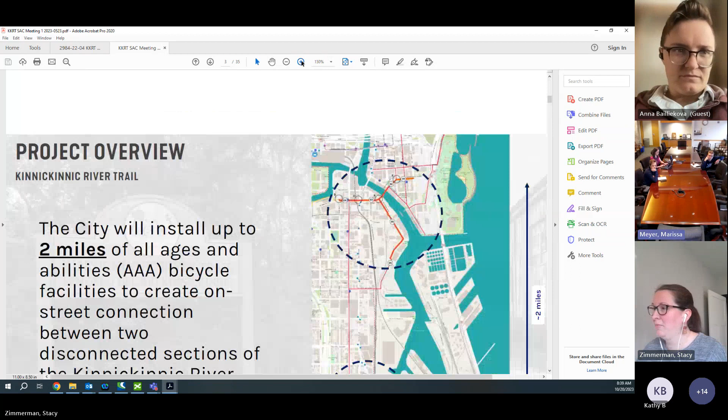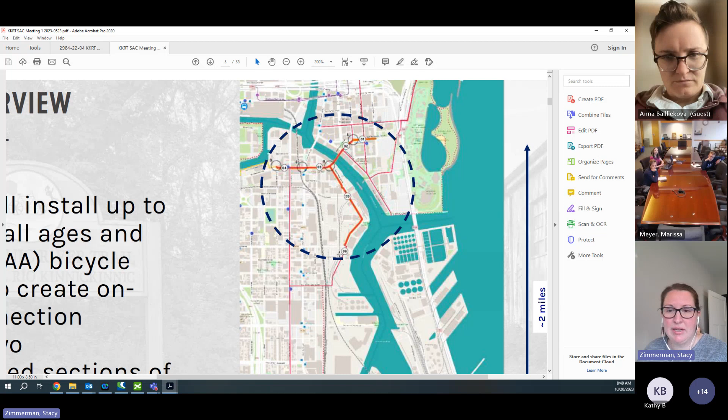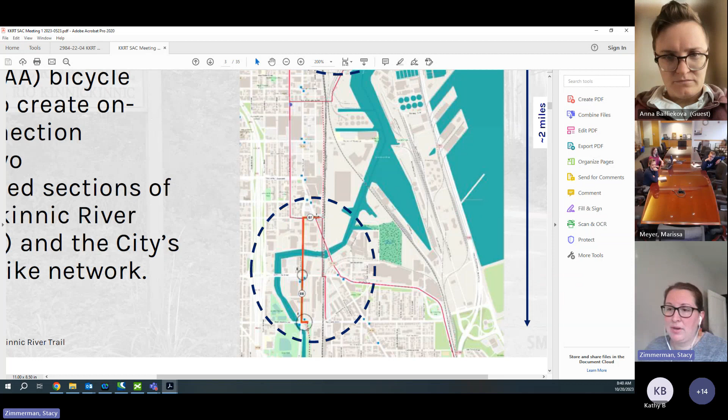So the northern segment connects over by Jefferson Street, kind of over where Summerfest is, goes over to Young Street, crosses the river, and then goes down Pittsburgh to the connection on the Hank Aaron State Trail, all the way over on the west side. And then the on-street connection will go down Water Street and connect up to where the trail starts, kind of over by Boone and Crockett on Water Street. And then we skip down because that's where the trail already exists, and the trail lets out on Maple. So we'll be picking it up there, going on Maple, down First Street, all the way to where the trail is existing on the south end.

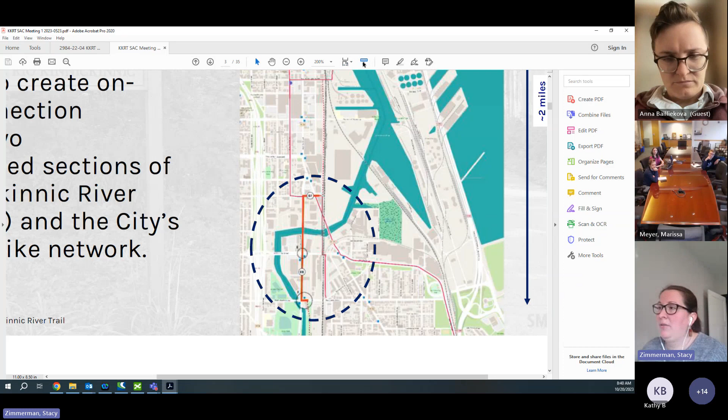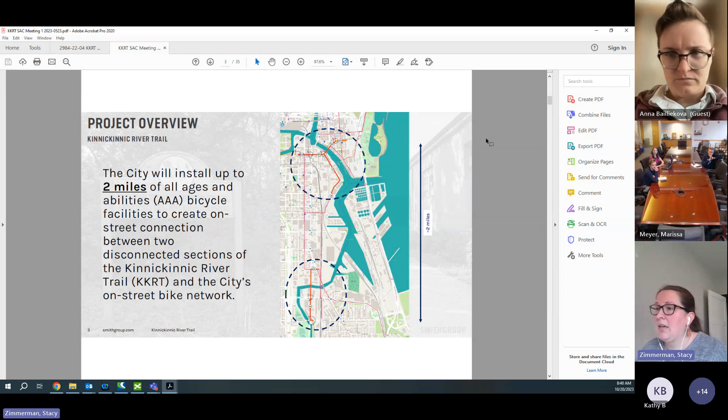So that's the 2 mile segment that we're connecting with on-street bike accommodations. The accommodations considered were one-way protected bike lanes or a 2-way cycle track, depending on the location in the street, whichever made more sense for the area. We're actually utilizing both of these alternatives.

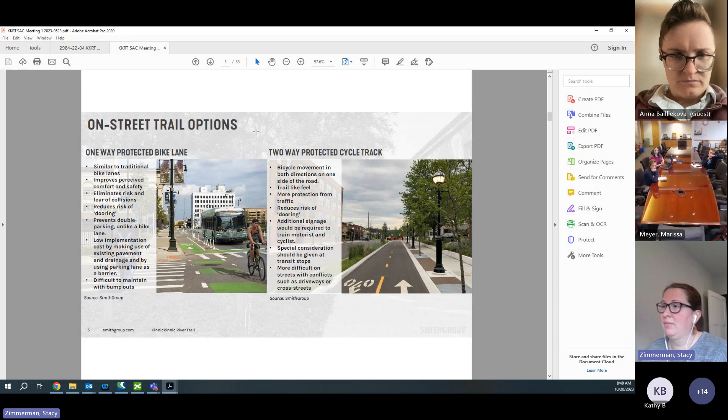So I'll skip to the map, which also takes a little bit to load, but I feel like this is the best way to really show where the project is located.

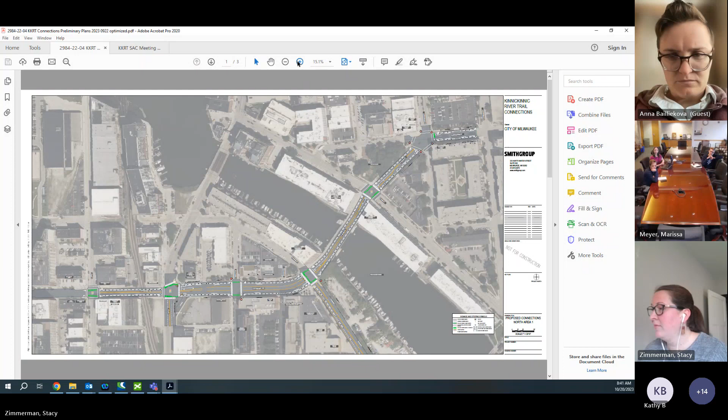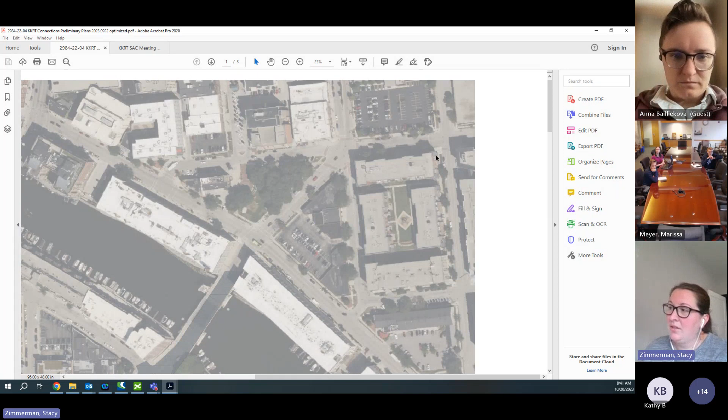So the segment starts over here on Jefferson Street. I assume you can see my mouse too, right? Yes. Okay, starts over on Jefferson Street with... oh, and I should also caveat that these plans are about in the 60% stage.

That means we still have to write a design study report and an environmental document, which gets approved by WisDOT because this project is utilizing federal funding. So once those documents are approved by WisDOT, then it's really a real project. It is a project now, but it's still all being proposed. Nothing is finalized, so these are our proposed alternatives for right now.

We are currently discussing with MCTS to see if they will move a bus stop, what are their needs. This trail does cross a state highway, which means that WisDOT will have say on what we do on those roadways. So this is what is proposed currently.

I don't know if anybody... The section of state highway is like Pittsburgh and crossing First. Is that correct, the only state highway? Okay, yep, so it'll be...

So it's State Highway 32, which the trail will run along on Pittsburgh. And then when we pick it back up on the southern segment, we're crossing at KK and Maple.

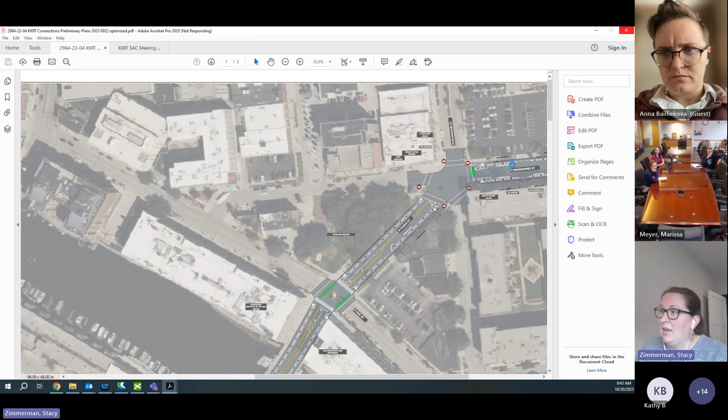So the trail picks up, starts on Menomonee Street over by Jefferson. And that is a protected bike lane with bollards and also with parking.

Man, I'm sorry, this file is really huge. So if anybody has particular intersections or particular segments that they're really interested in, I would be happy to discuss. Otherwise, as my file loads, I can just scroll through the project area.

Stacy, you could send this our way too, right? For the group to download on their own? I think, well, what is currently being shared is available on... so what's the website that we use now? It's... okay, Engage MKE. Yeah, Mitch already, he knows where to find it. So okay, good, yep, what's publicly available is on that site.

There's also a map where it has the whole trail segment mapped, and we've received a ton of comments from the public. We've had outreach at Harborfest, at a couple different bike events, and we've really gotten good responses so far.

So starting on Menomonee Street, that's a separated bike lane, parking protected, which means it's on the curbside. Going into the intersection here, this is an all-way stop intersection, and then the lanes will continue on the curbside going down Young Street.

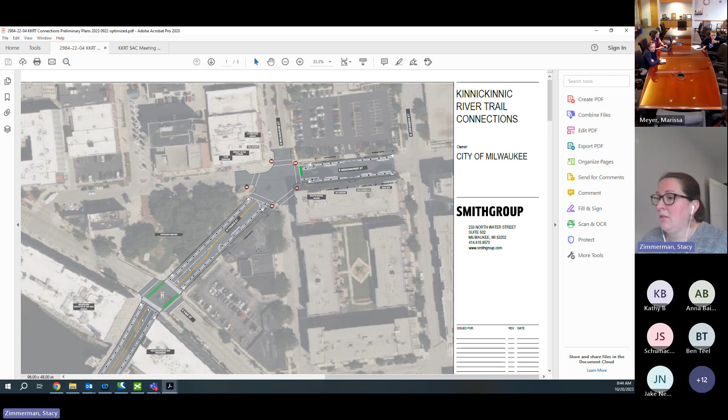Another feature we'll be adding is through the intersections, there will be green paint to try to notify vehicles that they should also be looking out for bikes in addition to pedestrians at the intersections. It's also a separated bike lane going down Young Street, and that segment will continue down Pittsburgh to be consistent.

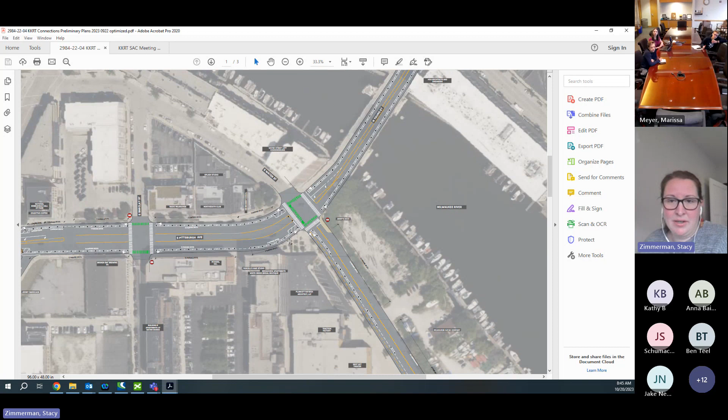There's a huge median down Pittsburgh right now, and we're extending the median just with paint to make it wider, limiting that roadway to just one lane in each direction. So in addition to providing the biking facilities, we're also trying to use various traffic calming measures to restrict the flow of traffic and get people to slow down, because in this curve particularly, people take it rather fast.

So by restricting the lane, by only having one lane, that'll also give bicyclists less lanes of traffic to cross when they are going south onto Water Street.

It's 4 lanes total now, correct? Current, yes, 2 lanes in each direction.

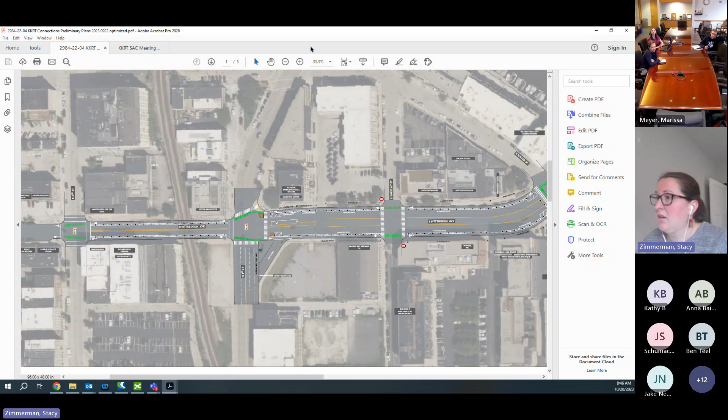One intersection that will be noticeably different will be the intersection of Pittsburgh and First Street. One of the goals of this project is we really wanted to close off the pork chop on the south side of the road, which means the slip lane for when you're going north on First Street, turning east onto Pittsburgh. You can see right here, I have the lane marked as closed.

So there will still be 2 lanes going north, but that'll increase visibility for the biker and limit people who are turning right. So when you're a biker crossing the intersection, you won't have to look as many directions for traffic.

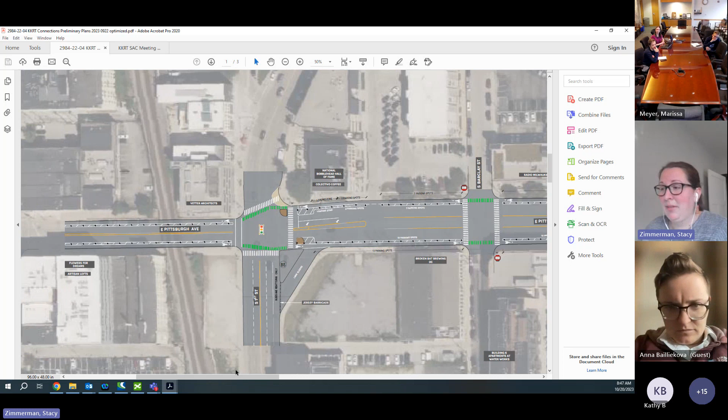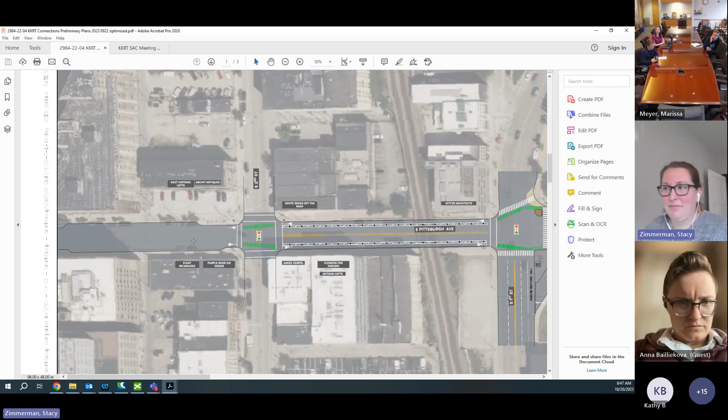This intersection is still under discussion because we have an MCTS bus stop on the pork chop, so we'll see if we'll be moving that further south. The bike lane will continue to the west, and once you get to the Freshwater Plaza area, we've decided to leave that bike lane as is because that segment has permeable pavement and we have limited budget for the project.

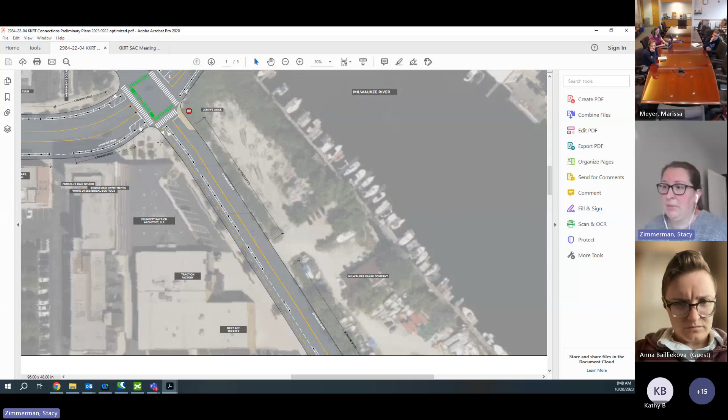So then going south onto Water Street, this is where we will be utilizing the two-way cycle track. The cycle track will be located on the west side of the road. One major reason for that decision was that there are fewer driveways on the west side of the street, so fewer conflict points. Also, the pavement condition is currently better on the west side - on the east side it's rather broken up.

All right, so going south then, there's the two-way cycle track. Should continue onto page 2 once it loads.

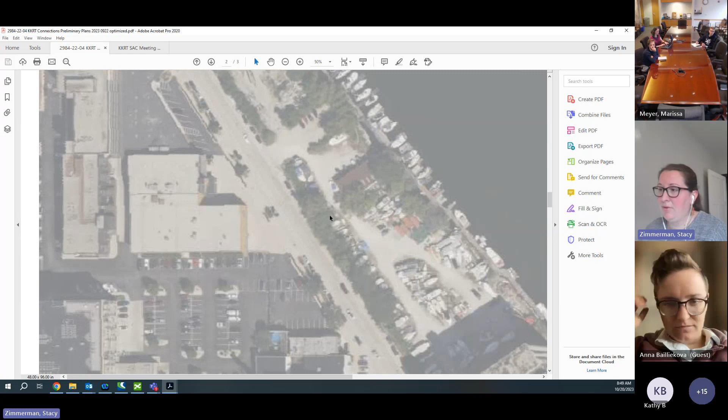And then any roadway that intersects Water Street going to the west, you will also see green paint marking to notify drivers of the bicyclists.

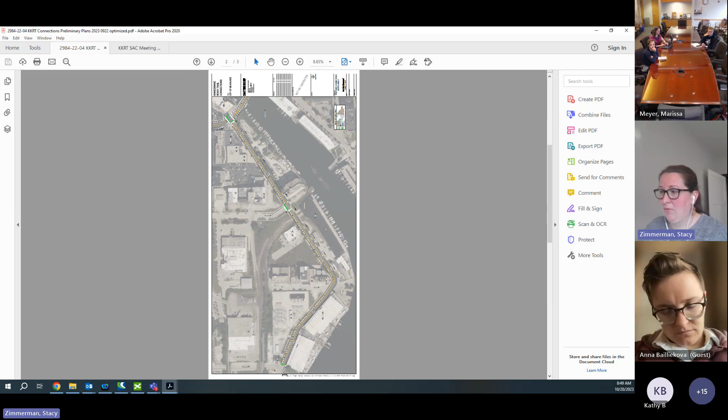Eventually the trail will meet up with the existing segment on the south side, and we will have to cross the bikes from the west side to the east in order to enter the trail, which is located on the east side of the road.

There was a good question in the chat about the railroad tracks there - is anything being done with those? We are currently coordinating with the railroads. There are various options to try to make the surface a little flatter, so your tires don't get stuck in it.

I don't know if that's going to happen, but design-wise, that's the area where we are crossing the bicyclists to the east side, so you will be going over the tracks perpendicular. Hopefully that will make less of a conflict, but the railroad will still be there.

And as you keep going, there's also particular interest in the KK and Maple and First and Beecher intersections. I'm not going to go back up to the north because this is taking forever to load, but the Water Street and Menomonee intersection, I know has also been a point that a lot of people wanted to discuss.

There is currently funding to signalize that intersection. The problem is, for one intersection, you usually want to tie it onto a larger project. So although there is funding and it has been designed, they're looking for a larger project to tie it into, which will be going through the area and constructed around 2027.

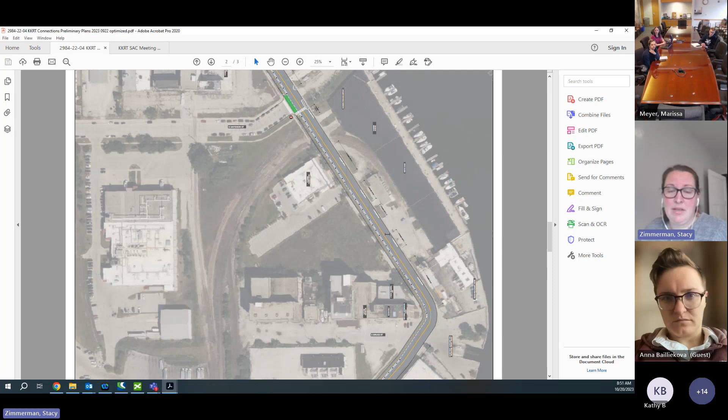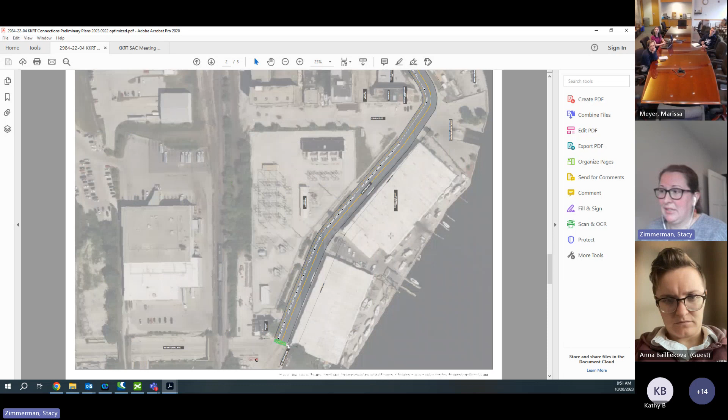In the meanwhile, with this project, which we are currently estimating will be constructed during the summer of 2025, we are looking into potentially adding a beacon at the Water and Menomonee intersection as a measure that'll be in place at least until the intersection gets signalized.

So to talk about the railroad, the only place on Water Street where the railroad will be crossed is at this crossing. We're also considering adding an all-way stop to this intersection. Then the bicycles will come from the two-way cycle track, cross on the dashed green crossing, and enter onto the existing KK River Trail.

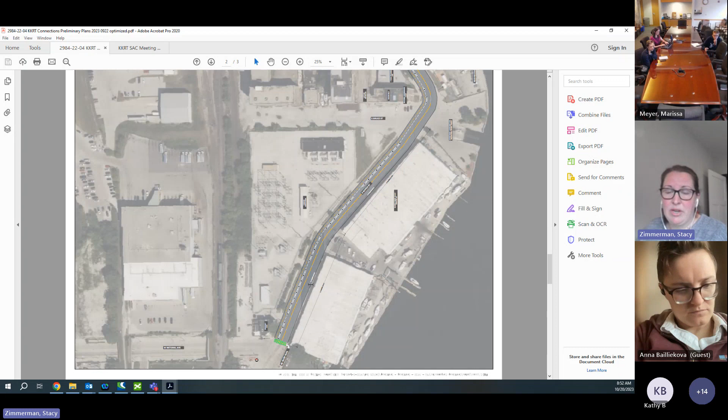I believe there is a crossing on the existing KK River Trail, but we are not touching any of the existing trails with this project - we are just connecting through on-street accommodations.

All right, and then the trail lets out kind of in a back alley area where there's a loading dock. I don't know how familiar everybody is with this project area, but the trail lets out and comes up to this intersection you mentioned, the KK and Maple intersection.

So this intersection, there are no plans to signalize it in the near future. I know many people have asked about it, but it has to meet the warrants of the City of Milwaukee. First there has to be a request, our traffic section will investigate if a traffic signal is needed, and then one of the big things is a funding source and approval by the state, because this is also a state highway. So at this time, we don't have the warrants or the budget to signalize this intersection.

But in order to make it safer for all users, we will be installing a rapid flashing beacon, so you will be able to activate it on either end of the trail in order to cross the road.

I know there's been discussion on the east side about removing parking, which has been removed for a while. I don't know, that's kind of gone back and forth. Our preference would be to remove parking on that side and have a bump out. It's been removed basically all of this year. But I believe from recent information, I thought it would be removed permanently, but there's a new tenant in that building who wants parking, and I'm not sure whose decision that is, it lies with the alderman and our traffic section.

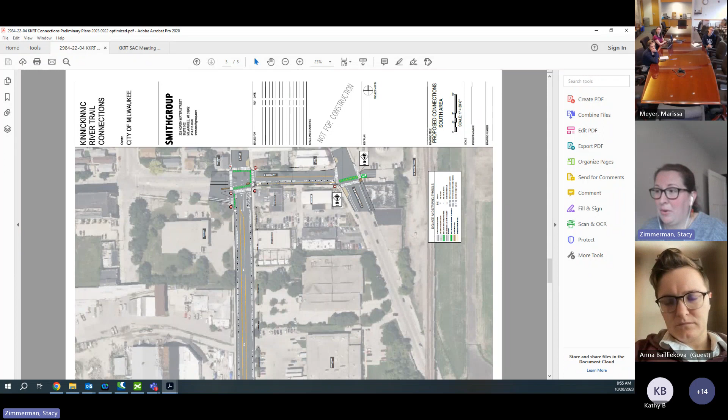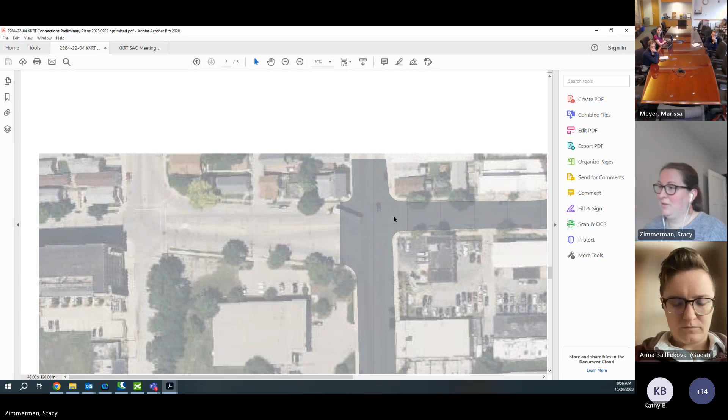And then this intersection looks a little confusing, but it is one of the best alternatives to try to get people through. We will add additional signage to try to make this a little less confusing. Basically anyone coming west down the trail will either, in order to continue straight, have to cross north and then go west. That'll lead them out onto the on-street bicycle facilities that already exist, which I believe might be a sharrow on this road. Or they can continue across the green hatching and go south.

So our main goal was, the green paint isn't just for any bicycle facility, we're trying to clearly show where the trail connections are. Our main concern was to get the people coming from the cycle track south to continue on the trail, but also provide a clear indication of where you should be going if you're going straight, which would be off trail.

We were thinking about closing this pork chop, but at this time, money-wise and with the geometry of the intersection, we're not going to be able to accomplish that with this project. But there are future plans and hopefully future funding where we'll be able to close this slip lane.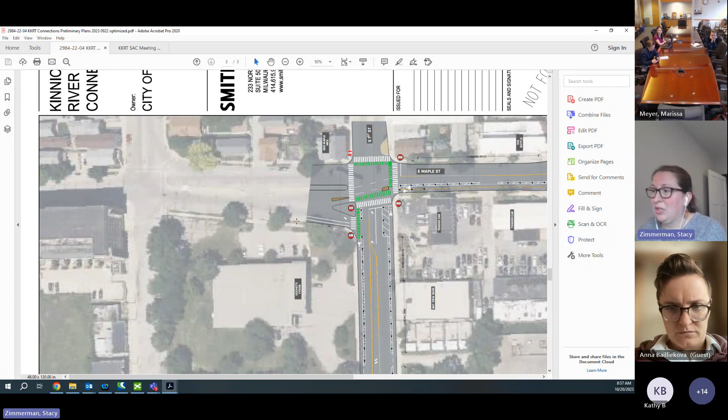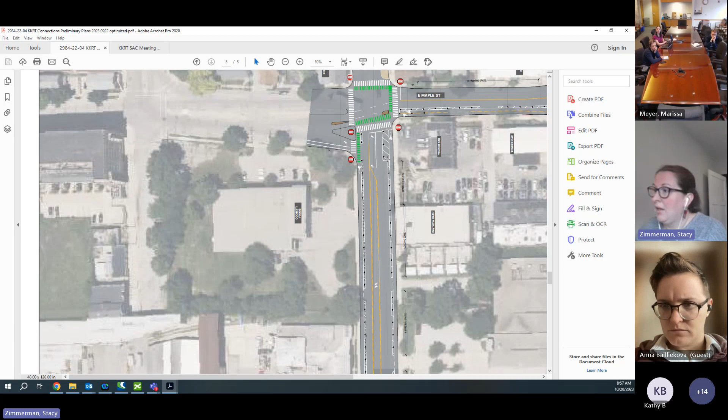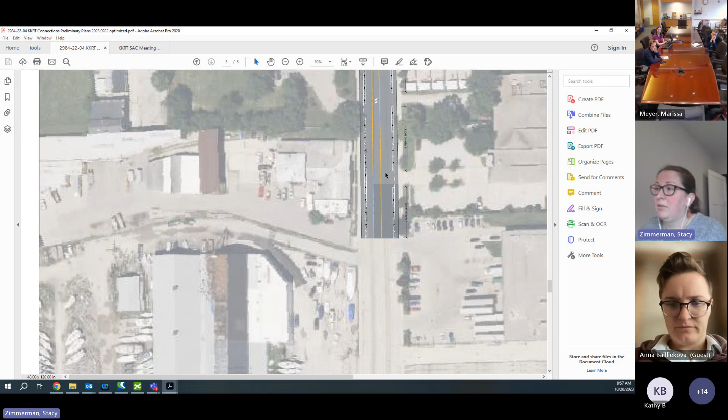Going south then, we're back to the separated bike facilities curbside with parking on the east side. The reason parking is on the east side is that during the course of this project, we've been talking to all of the businesses along the trail, and the greater need for parking was on the east side of this roadway segment. But once we hit the bridge, parking will switch to the west side of the road, and the bicycle lanes will continue south.

Is there need for any parking on the southern end? Both the Lincoln warehouse and the new development across the street have a lot of off-street parking there. You're talking south of the river? Yes. I know what you're saying, but there is room for parking. Another reason is we are restricting the driving lanes, so we do have the roadway width to include parking. So in a way, it takes up space, but also provides a service.

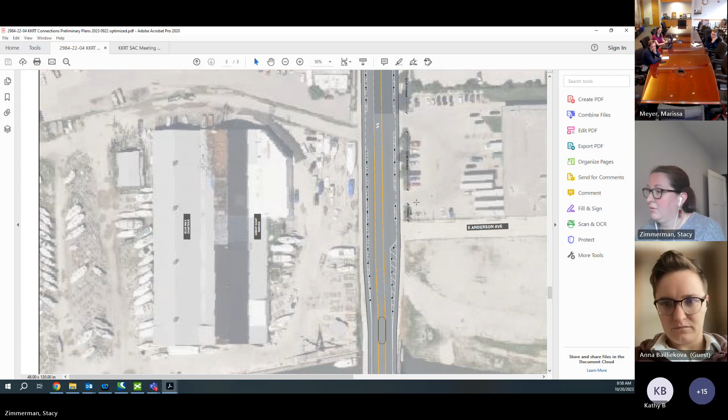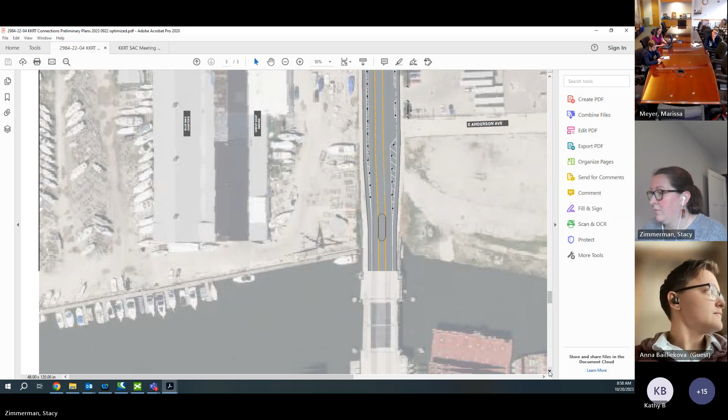Another point supporting what was just said - closing that slip lane would be good. We agree.

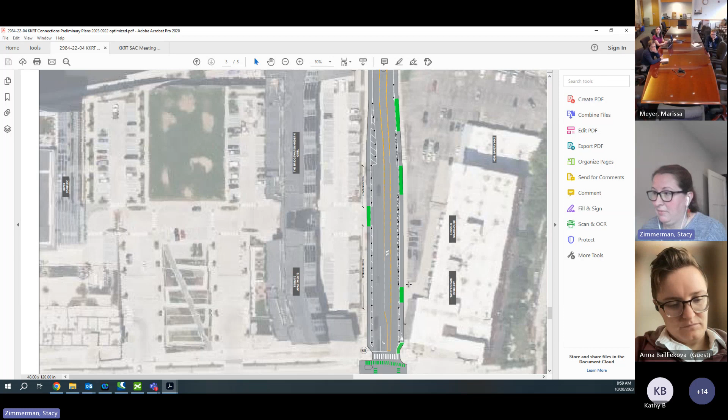Here's the new development too, with residential and commercial uses, and there's been a noted increase in traffic, especially people coming fast out of the parking lots. In this segment it's shown as solid lines, but it'll actually just be striping. We decided that from Beecher to the river it was important to mark out all of the driveways, to get drivers used to the new traffic pattern with bikers curbside, and also for bikers to notice they're crossing an entry into one of the businesses, since the building on the east side has multiple entrances into its parking lot. Then as you can see, the parking shifts to the west side of the road.

The Beecher intersection was recently redone with bump outs, so we're leaving the bump outs as is. I think all of the green paint out there is existing. Does anyone have questions on this segment while it's loading?

Hi, Stacy, I do. On the northeastern corner of that intersection, Beecher and First, it's a difficult corner to take on a bike heading westbound on Beecher to turn right onto First Street. Given how the bump out forms with the bike lane - is this the movement you're describing? Yeah, I'm wondering if that could be reconfigured in some way to make that less of an acute angle.

Are you talking about the bump out? Yes, I've noticed several people using that bike lane who will actually use the curb cut at the sidewalk to get onto First Street rather than staying in the roadway around the bump out. Okay, I'll mention that to the project team - I haven't heard that one yet.

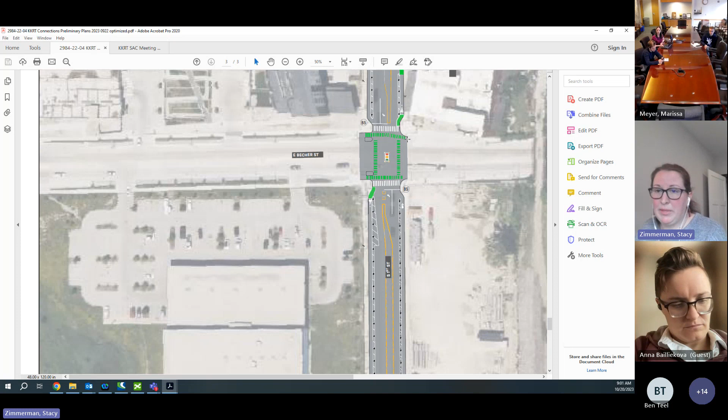Great, thank you. Anecdotally, from a personal perspective, it's even more difficult to do if your bike is loaded down with groceries or cargo, or if you have a longer than average bike. Right, I'll mention that to our project team. I'm not sure if we can do anything because we are focused on the trail, but the multimodal team did just place that out there, and I will definitely tell them your comments as well. Great, thanks.

And then going further south on First Street - hold on, I'm sorry, this is Jake, I have a quick question. I want to second that right turn movement from the protected lane on Becher North - it's a very challenging right turn out into the lane. If you have a car turning left, there's an instant conflict point there.

Also, those lights at that intersection have been on temporary construction poles since the beginning of this. Is there any plan to finish and install all the lights instead of having them blocking the sidewalk on concrete blocks? I don't know currently, but I could ask our traffic section, and Marissa can follow up with the group later. I'll add that they're behind the old ones, so they're kind of blocked, which can be difficult.

Add signals - and I've been told, I think Mike Amson told me, that they were waiting on some sort of supply issue. No offense to anyone personally there, but it's getting kind of ridiculous that they can't get the supply after two years, whatever they're waiting for. So yeah, Mitch is right, it's being blocked. It's still a very frustrating intersection for people on bikes.

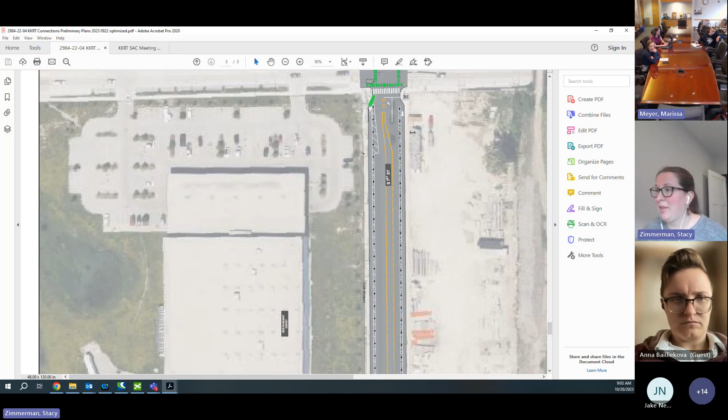Okay, I will relay the message and see what information I can find. I can say, though, that a lot of our ordering for supplies or traffic lights requires placing orders sometimes a year in advance. Supplies are still kind of crazy right now. Understood, thank you. I haven't been there personally, but I will follow up with your question.

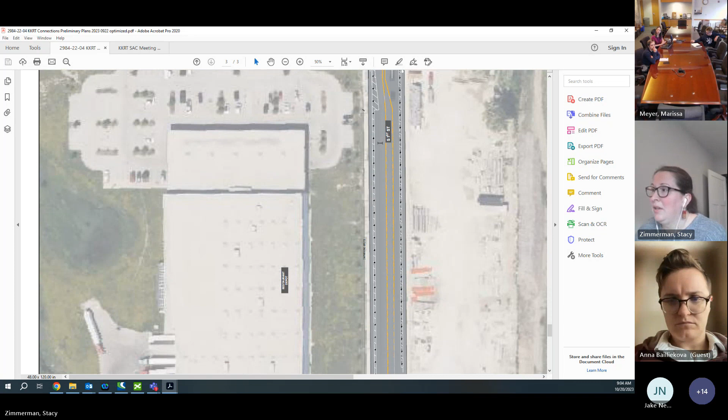Going south then on First Street, there will be parking on the west side of the road, with protected, curbside bike lanes. Eventually the last part of the trail crosses people to the east to meet up with the existing trail, which is a beautiful trail with a beautiful sign. When I started working on this project, I didn't even realize that the trail started there.

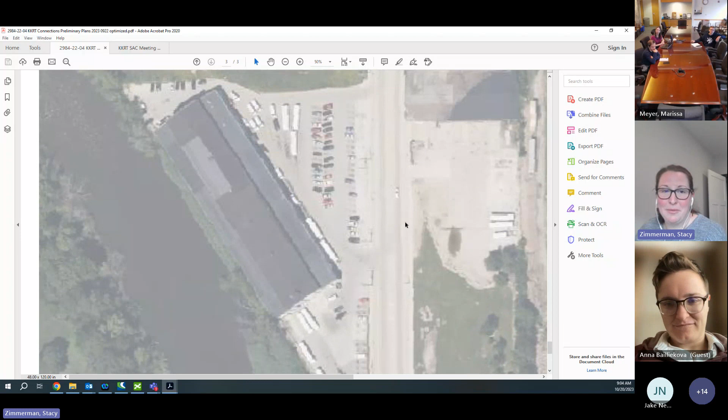Kate has a separate project going on that will install a lot of signs, and it's a great plan for wayfinding, so I think that'll be installed with this project. Hopefully that'll increase awareness of the trails and make people more aware of the options that are out there.

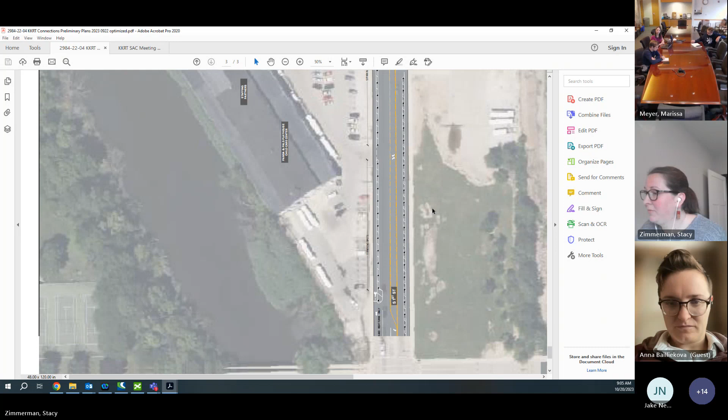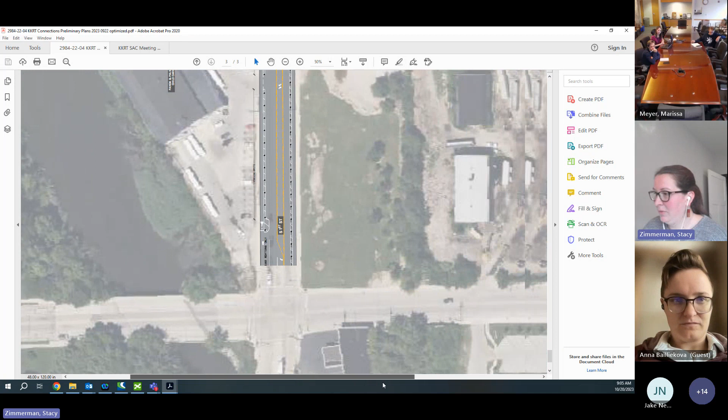I know as this plan is shown, there are still a couple changes that will be done before the final design. So the lanes continue going south. And if you are a biker heading south, there's a bike box here designated where you should stop and wait to cross the road going south, and then to cross going east.

There is a small portion here that has a two-way cycle track. That's to make it convenient for people getting on and off the trail, and also for anyone coming off the trail and going west. We don't want you crossing the road at this location because it's too close to the intersection. The best, safest way was to have a two-way cycle track leading people back to the intersection, where they can cross the road, go north, and continue on Lincoln.

The part that's not shown on this plan is that there is a new development, which I don't remember how many units, quite a few hundred I believe, of apartment buildings that will be going in this long, narrow strip. It doesn't touch First Street, but it's off to the side where this old manufacturing plant was. I believe they will be starting that rather soon, within the next year.

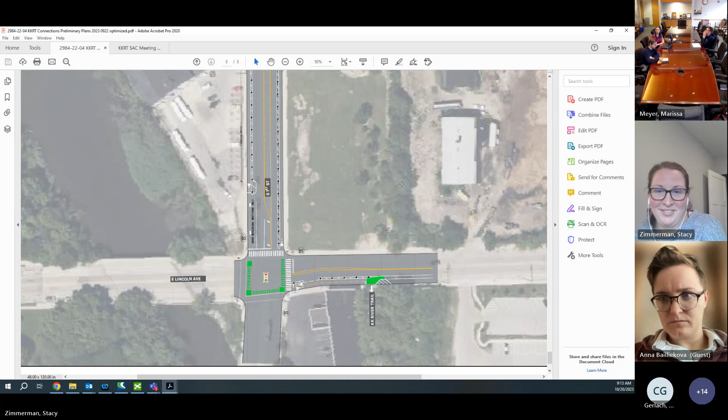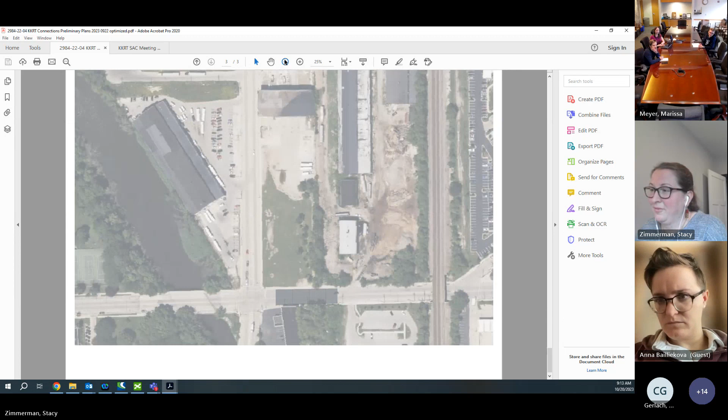Did any committee members or members of the public have any questions or comments? Did you review keeping the Water Street segment on the west side all the way through to the KK Trail? Or did we just say there's a trail on the east side, so let's connect to it? Because now you're going back and forth across Water Street twice in like a half a mile.

The question was, the new two-way cycle track on South Water is on the west side, and having to move to the east side means you have to cross twice. Was any consideration given to staying on the west side the entire time? Yes, because on the south side you go back west again.

This project was specifically designed to connect existing trails, so we did not consider moving the existing trail with this project—we were just connecting to it. We did consider putting the two-way cycle track on the east side of the road, but based on the amount of entrances for parking and businesses and the current condition of the road, the two-way cycle track was chosen to go on the west side. But no, we are not changing existing off-street facilities with this project.

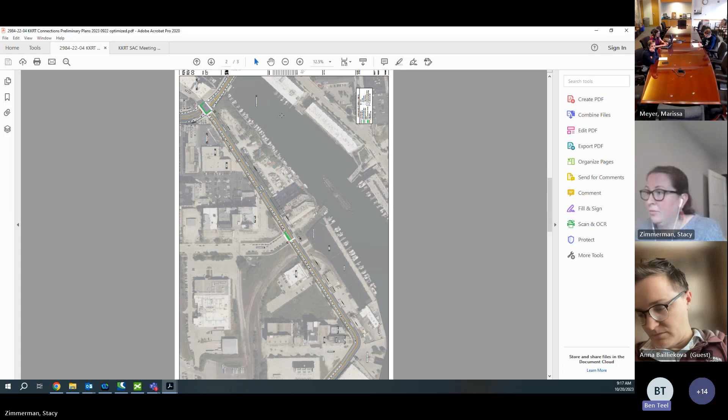Nope, it will still be the existing metal plates. We did talk about that with this project - those metal plates are specifically fabricated for the exact location they go in on the bridge, so we can't even pick up the plates and move them a little bit. You would have to refabricate the plates, and that also changes the loading of the bridge. It snowballs into around $250,000 to $300,000 just for the cost of the plates, not even the design. And anytime you're changing it, because the bridge does move, we need to balance it for loading when it opens. So it priced us right out of doing anything to change that bridge.

Thanks very much for that clarification - yep, they're really important plates for construction. With our construction dollars for this project, we are just shy of $1 million. That's the amount of money we're playing with on this project. That's also why, for the freshwater plaza area, we determined that section of the trail was working quite well as designed, so we're trying to put our money into the more troublesome areas.

Thank you. There was also a comment from Jake about school buses in the protected bike lane on Lapham, just generally that this is a problem throughout the city. He also asked about reporting a non-functional beacon. For that sort of thing, if you see problems in the city that can be repaired, please use either 286-CITY or the Click for Action website and app.

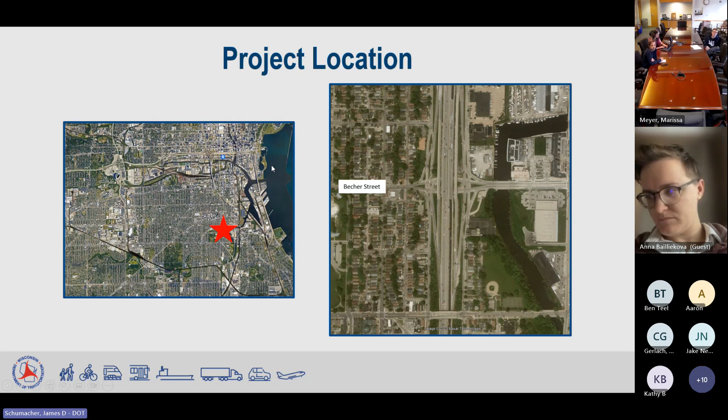So the location is at the I-43 and Becher Street interchange in the city of Milwaukee. We are aware of the interest in this area. It's a good segue from the last presentation with the trail just adjacent to this, but there's been the Michels development that's been added recently, as well as the reconstruction of Becher Street up to the bridge over the KK River, and the road diet and the improvements you guys made with the separated bike facilities, tying that all in.

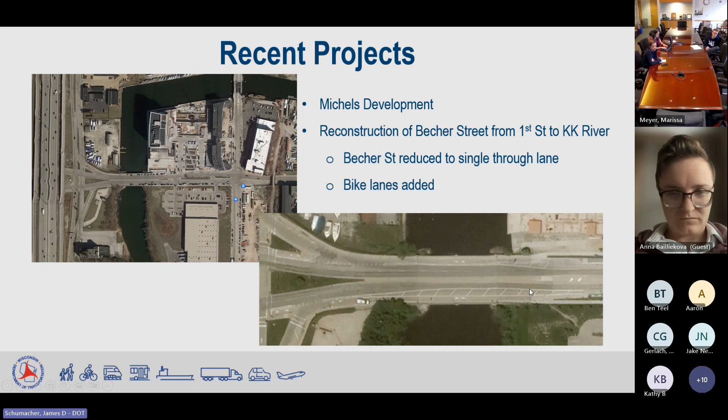There's a couple upcoming projects we've been working with the city of Milwaukee and MMSD on. There is a green infrastructure project - I think the barrels finally just started going out there. MMSD is proposing some green infrastructure underneath the I-43 structures. You can see on the right side of the screen there's some bioswales and streams or stream beds to collect some of that water from the top of the freeway system.

A couple other things along the south side and north side of Becher Street - they worked with the city and are proposing a shared use path in that area, as well as four curb ramps that are being updated. Once this project finishes up, we'll go out there to collect some survey to make sure our improvements for the overall interchange fit this footprint they've designed here. We're also aware of the development to the east for the Filer and Stowell Lofts development as well, so a lot going on in this area.

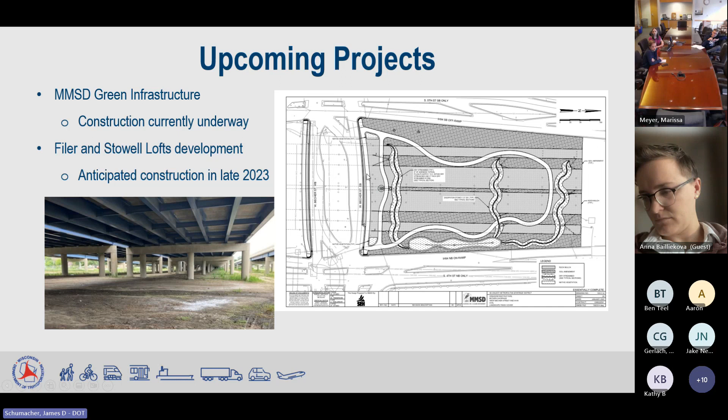One of the things that brought this project to light: we had the recent resurfacing of the main line in '22, and there were some ramps pulled out from the stretch between the Marquette interchange and the Mitchell interchange. There was some right-of-way issues with curb ramps, but we'd also heard concerns from the city and local stakeholders about pavement condition, which we'd neglected for a long time, as well as operational and safety concerns related to the scissor ramp.

It's probably one of the most confusing interchanges in the state. So we circled back and revisited some of the crashes we'd seen here to see if we could get any additional boost. We wanted to look at this as more than just a pavement replacement kind of project, knowing the city's thoughts on that as well as the public backlash we might get.

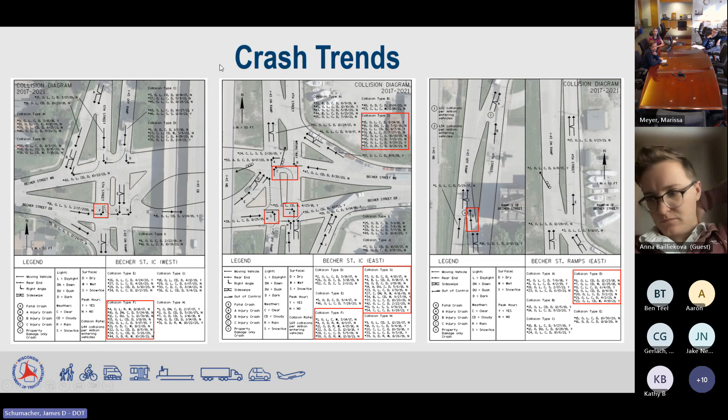Looking at the crashes in more detail, we saw confusion with the scissor ramps, the lack of monotubes at this location, failure-to-yield crashes, and drivers missing those scissor ramps. For example, if you were going north along 4th Street and missed the scissor ramp to go westbound onto Becher, vehicles would continue along the frontage road, come through the intersection as shown in this picture, and make a left while the off-ramp and on-ramp also had a green. So a lot of crashes happened there.

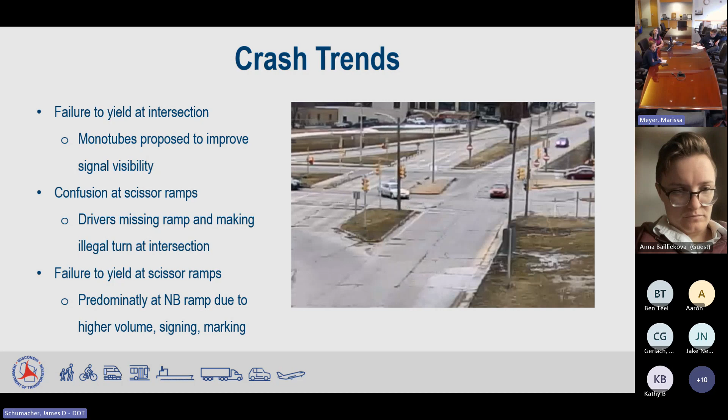More specifically at the scissor ramps themselves, especially the 4th Street scissor ramps, there were failure to yields. Again, there's been a lack of marking on both WisDOT's and the city of Milwaukee's sides, and that marking has faded throughout the entire interchange.

So that's the update I wanted to give you today. We just put out our 30% plans in September, so the design is still at that preliminary concept stage. There's a ways to go with coordination on all the things going on, but I wanted to emphasize our goal here is both to address the pavement condition and make this project something the community can benefit from.

There's the overall reconstruction of the corridor looming in the next 20 or 25 years, from the Marquette to the Mitchell. So this concept you're seeing here is meant to bridge the gap to that overall reconstruction — we're looking for these improvements to last 20 or 25 years out there.

Ultimately, with an upcoming study, there could be additional improvements. So we're trying to get the most we can with the constraints that exist out there. This exhibit shows bringing the scissor ramp configuration to more of a traditional diamond interchange, reducing conflict points and eliminating some of those extra intersections through here.

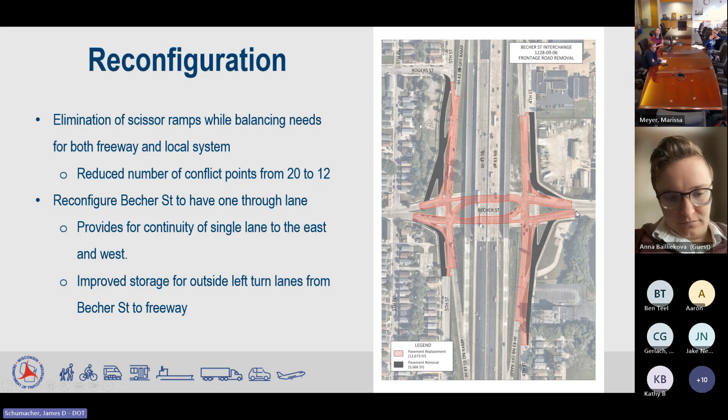On the next page we can go into more detail with the plans, but as mentioned, with the improvements to the east with the road diet down to a single lane, we're proposing a single lane on Becher Street through here as well, which would also improve operations, along with extended left turn lanes for the dual lefts there.

I did share these exhibits ahead of time with Marissa — this PowerPoint and a PDF of the concept are out there.

As I mentioned, we did have 30% plans recently, and we're looking for as many comments as possible to improve this. But I'm sure your focus is more on that connection to the east, and how we set this interchange up for any improvements west of the interchange that the city may have a project on. So I did mention the shared use path.

We're proposing to leave that in place on the north and south sides, which will be built, hopefully completed by the end of November. I know they're running on a time crunch here.

We're also looking to bring these right turn lanes to the on and off ramps closer to 90 degrees — you'll see at the off-ramps we've got those pretty close to 90. There were some comments at 30% to eliminate this additional third lane in both the southwest and northeast quadrants, so that design will be modified to bring that in at more of a 90 as well. We're still looking at whether those right turn lanes will be stop-controlled or signalized.

Currently, they're signalized, and the city has expressed desire to change those to stop control. These 4 quadrants are kind of where we're looking to refine.

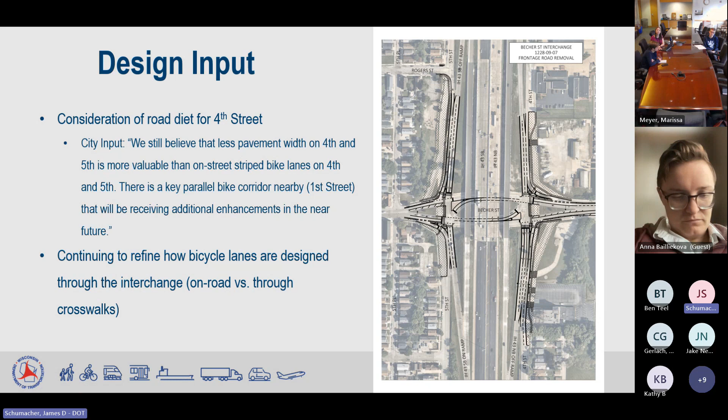The last thing I want to discuss — I've heard talk of improvements for Lincoln Playfield, as well as a potential river walk from Lincoln up to Becher. We've been in some conversations with the Harbor District regarding this, as well as what's going on with the school here — it looked like that was for sale on 4th Street. So there'll be some more outreach with them.

But depending on how this river walk crosses Becher Street, there is potential for improvements for a crossing at Becher as well.

As far as the project schedule goes, we're looking to wrap up our scoping this month. Again, our final design won't be approved until DSR next spring, shooting for May. So there's still some time to make adjustments or refinements to the plan, but ultimately we're looking at construction in spring of 2026 for this project.

Danielle, is there anything else you want to add regarding the bike lanes along Becher, just some of the design constraints or other things you're looking for as you proceed forward with this?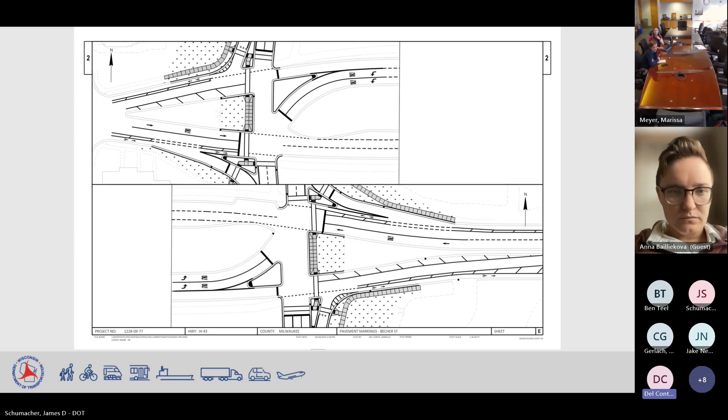No, I think the only thing we would love some guidance on is methods of protecting the bike lane. I know we have it currently shown as painted, and whether we would add bollards in there to further add some separation. So we're definitely interested in hearing your feedback.

I see there's a hand raised right now. Yeah, Ben. Yeah, please, Ben.

Hi, thanks. I just want to be clear — there will be two shared use paths under the interchange. There will be one along the north side of Becher as well as the south side of Becher Street.

Okay, great, thank you. We were debating — or I guess we passed this off to the city — whether what they wanted to see here in the shared use path was the consensus that they came up with.

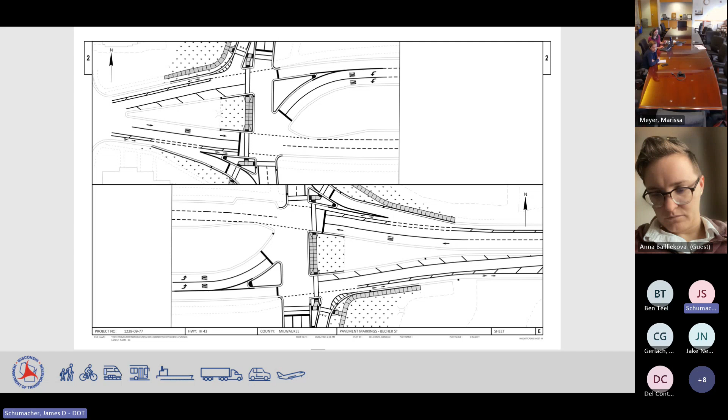We do have a question. Is there a link to a project website you can share? And are there any options for commenting on that website or any other particular way?

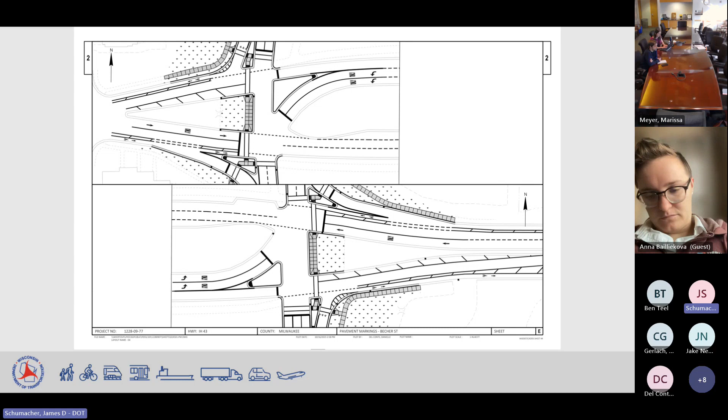The website is pretty vague right now, but we could forward the 30% Bluebeam review session that provides access. I did provide you with the 30% plans, the full plan set, and I could send the link to that review session, there are some comments in there already, but we'd be open to more. We plan on some public outreach next winter or this upcoming winter/spring, and the website should have more information then, but we can get you something ahead of time.

I appreciate this. I would, at least personally, kind of agree with the city in terms of having on-street facilities for 4th and 5th not being all that critical. For me at least, a freeway on-ramp or frontage road is not going to be my first choice for traveling.

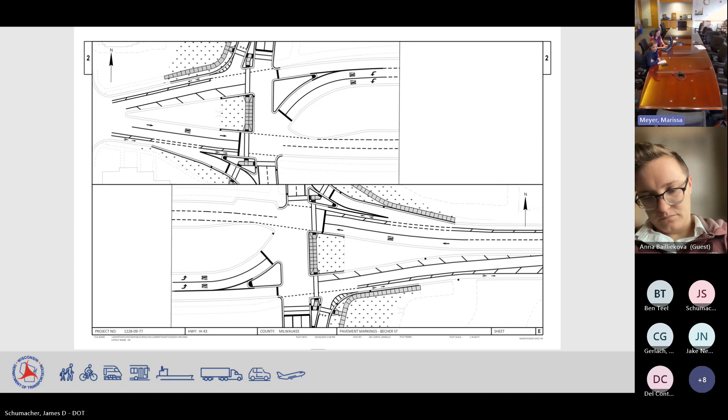But as far as the east-west route, you mentioned there is the potential to do an on-street painted option, which I think would be a difficult choice, or a bad choice even. The sidewalk, I think you said you would potentially make wider, and you'd kind of have a 2-stage, potentially signalized or stop-sign controlled crossing to get onto the shared use path underneath the freeway. Did I understand that?

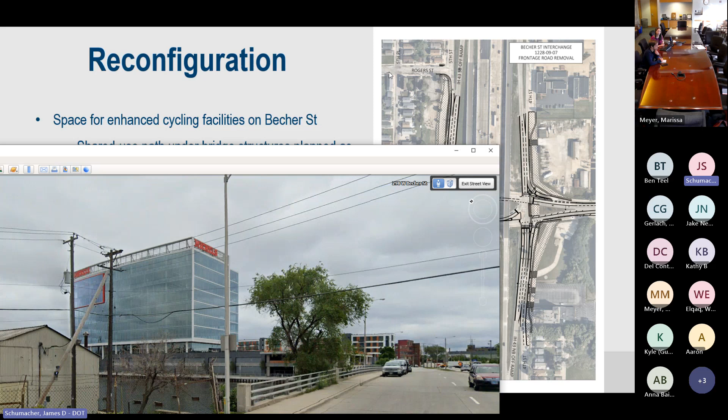Yeah, we're waiting on some of the survey there and confirming the right of way. We are trying to avoid right of way on this project because of the pavement condition, we want to get out there as quick as possible. But there is a possibility, this bridge is fairly new, so at least in that northeast quadrant we'd have to come off somewhere west of the bridge, with a potential widening through the area between the existing sidewalk and the fence, and then that 2-stage crossing there.

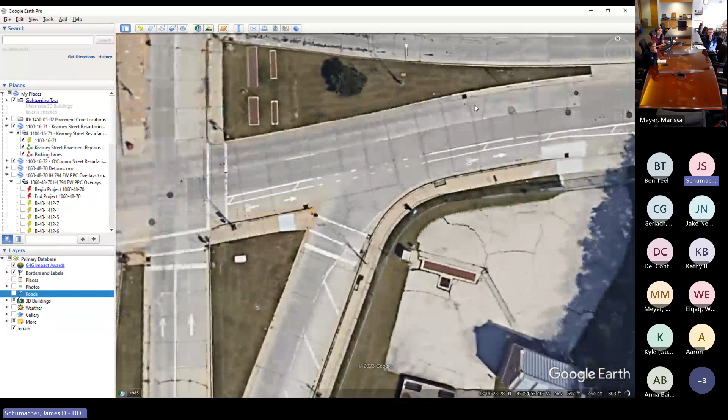But I believe that the way it's set up existing, with those recent improvements, it does go from a separated facility, at least on the structure. Any widening there would be tough, but we could potentially pull it back up before the interchange, if that makes sense to you.

Jimmy, could you pull up the plan set that shows the through line on Becher? The one in the PowerPoint, more zoomed in view.

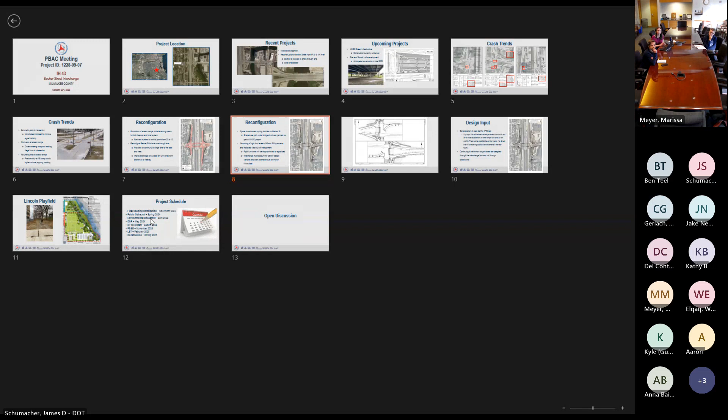So from the design perspective, and this is something we'd love feedback on, the idea would be to replace the sidewalk with a wider continuation of the shared use path, getting the angle through that pork chop island. Would that be navigable by cyclists? It would be a pretty sharp right turn from the wider shared use path, then sharp right through the island, then down onto the multi-use path under the structure. An on-street facility would provide the most direct, straight-through line, whereas the shared use path alternative would make that path pretty windy trying to get through the island and into the shared use path on the other side.

Yeah, I think that's a really good question. I know there are folks with cargo bikes and things where the turn radius is a little more difficult, especially on those tight 90-degree turns. So if any of them are on the call and have thoughts on navigating those versus an on-street option...

Maybe, as you said, potentially bollard protected if it went straight through, right of the turn lane. In that area, right before the stop bar, you can see where it's hatched out. We could potentially put bollards there to provide additional protection, or possibly even a concrete curb, so while everyone is waiting at the stop line, there is some physical separation between the vehicle lane and the cycling lane.

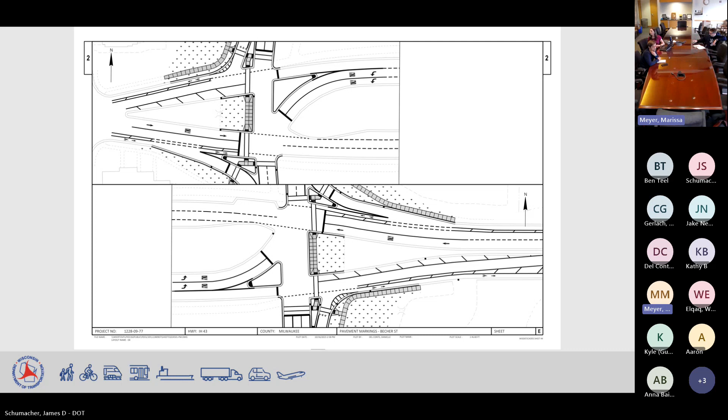As a point of reference, at LMD, Lincoln Memorial onto 794, there's the west side shared use path. Navigating that pork chop, where you've got the double right turn lane, it's fairly spacious, but it's still kind of a pain in the ass, making that kind of jagged right turn as she's describing.

The other general comment I have is if we have a light controlled right turn slip lane there, if it's prohibited right on red, that makes a huge difference, because I run into the issue all the time there specifically, which I know is getting changed, but cars are just flying through it. So even though it's a hard turn, you're doing a bunch of tight turns and you can't see what you're doing or what's coming behind you.

Yeah, I think that's a good point. It kind of reminds me of the roundabouts on Canal for the Hank Aaron, you have to make these very tight turns. So I'd be very curious on a broader set of feedback from different types of cyclists on what would be preferred there. But I appreciate that you all are thinking about it and looking for feedback on that.

Yeah, and I think that's a good point, that we can bring some of these specific comments to a more formal public involvement meeting and kind of see what the users in this area would prefer.

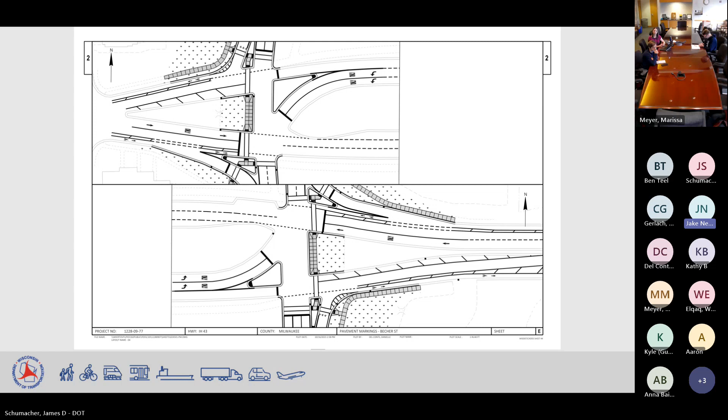Go ahead, Jake. As a cargo bike rider who also rides with children in this general vicinity, I think anything that can be done to continue the design that's east of here in some sort of continuity. I made the comment, you saw a truck was already parked in that bike lane in your satellite view. So the fact that you've got bike lane and then all of a sudden now it's parking and we bump people out, that's got to be fixed. You can't just dump people into that dangerous situation there.

I would be in favor of widening that path on the west side of the river. And as far as making that sharp turn into the 2-stage, I agree with Mitch that the canal, A, there's that huge bump there that's been there for 15 years and no one seems to want to fix, B, it's very difficult to make a turn. So maybe it's a wider or more gradual apron that can allow for that, not just the 2.5 foot wide sidewalk.

And then, yeah, you're definitely going to have people flying through that slip lane to make their on-ramp, and where you're asking them to speed up at an on-ramp, I see people blow that stop sign all the time. So there's about 6 pinch points here, and I don't know if I have the overall solution today, but I think those all just need to be considered as far as the through connection there, and as much consistency as possible to not have it change 4 different times on where you are supposed to be riding through there.

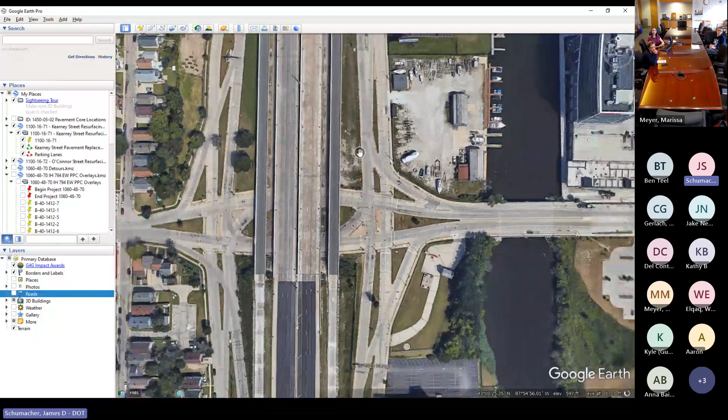As well as these slip lanes, WisDOT and the city of Milwaukee, there's been a larger discussion on raised crosswalks and what goes along with that. WisDOT's concerns are some of the plowing, drainage, and then just maintenance of those. That's a policy continuing to be worked on from our central office folks. That has also been a desire at those four quadrants. I'm hearing people running the lights, whether it's signalized or stopped, people are still maybe going to do what they're going to do.

So that raised crosswalk discussion is still out there, still kind of being formed, but all of these improvements we're showing, that's kind of WisDOT's base. Anything WisDOT is funding, this alternative is 100%. But some of these other things we're mentioning, bollards and protection and those kind of things, that ultimately has to be agreed to be maintained by the city, and there may be a slight cost share with that. I just want to put that out there as well.

Thanks, and I just want to add one more point. Not my school, but there is a school south of there on 4th that I see lots of, especially at pickup, like there's a lot of increased traffic there. I don't know if you've talked with that school, but definitely just a high traffic situation to be monitoring, and maybe outreach to that school about what could be helpful for them to make pickup work. Obviously we'd love to see all the kids biking there, but there is the reality that there's a lot of cars coming through there for pickup, interacting with the off ramp.

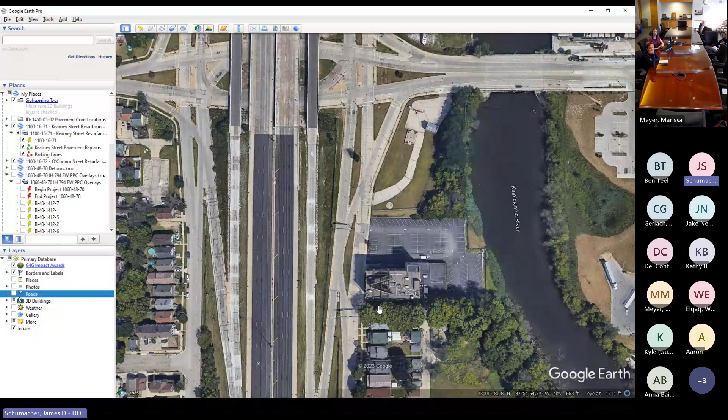Okay, well, locating schools next to a freeway isn't really that great of an idea anyway. Right, but thank you, I didn't realize that it was temporary. Yeah, we'll do a little bit more follow up on there. Currently the design does have, as I mentioned with the road diet, we are bumping this out and providing some space for school buses. But based on the video we had here, it looks like they kind of circulate through the parking lot, but we did want to protect that drop off zone as well. That'll continue to be refined.

Did any other committee members or members of the public have questions or comments?

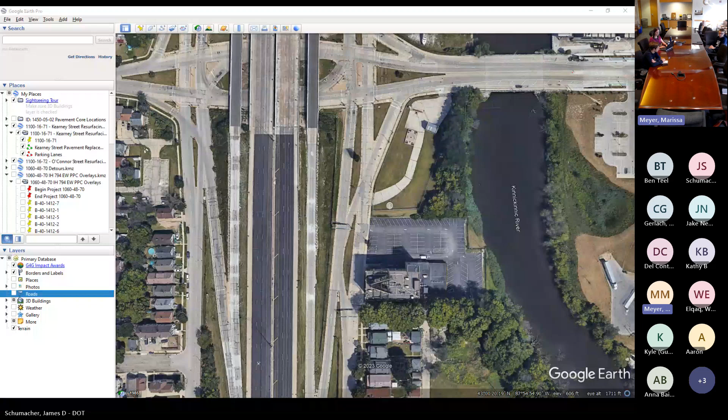I think I like where the understanding is in terms of what needs to be figured out for the bicycle accommodations. I think hopefully there's a variety of feedback from different types of cyclists and different people. I don't know that there is an obvious answer here, but I think... Yeah, so I'll get you that link, I'll extend it. If it'd be appreciated if we could get comments in the next month or so. Like I said, we're kind of in a lull waiting on that MMSD project to wrap up, but yeah, be good to get a meeting of the minds here and some consensus on what the best options are out here.

We're certainly open to it. We're not experts by any means, and that's why we appreciated you guys reaching out to us today, to talk further and get that out there. Yeah, definitely appreciate you taking the time. And you said there was going to be a public outreach meeting or something similar early next year. Yeah, and we'll add, I guess Marissa, if you maybe wanted to take the lead on that, we can forward future design meetings to you.

The city's involved, but we can make sure this group's aware of it as well. And for any public outreach, bike groups, all of that, we always look for your guys' help, since you're more in the know on who's riding in the area and who to reach out to. We don't want two people showing up at a meeting, so the more the merrier.

I'm sorry, can I ask one more question before we move on? Just on the oversized overweight issue here. I want to remind people that National Avenue is oversized overweight, and we've seen a lot of creative changes in proposed designs there.

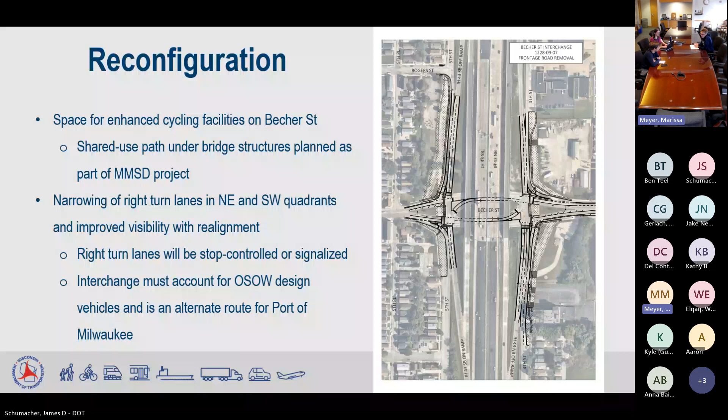So the next item was originally daylighting, which we're deferring to next month. The last one was the vacancy. We're working with Alderman Spiker, who's the chair responsible, I think, for public works or public safety, for nominating Larissa's replacement. We're working with him on the process to get that done this week. Hopefully we'll have some news soon, but that's all I've got for now.

Just give us the five minute warning. Unless there are questions, we can talk about it. Otherwise we can move on to the work group updates and then new business. Do we have any work group updates? I know we didn't meet for targeted improvements.

I can briefly note that at the DPW, we had a DPW meeting. I attended a meeting with Stephen and Mike on September 23rd regarding the Hank Aaron State Trail connections and improvements, and that's moving forward. There's a video for those who want to watch it. I think it went really well, the committee seemed really receptive, especially to the signage, and supportive.